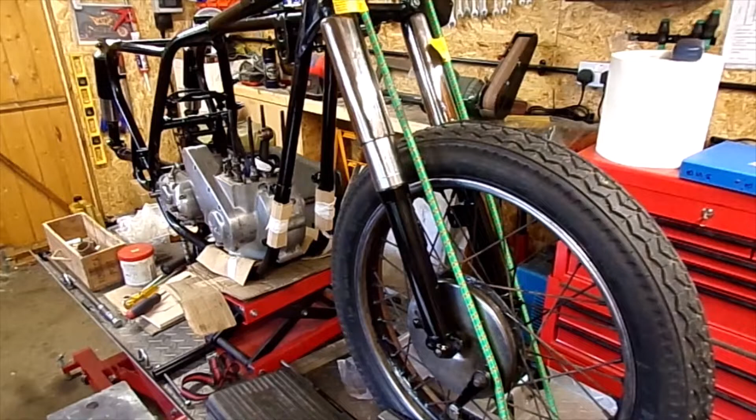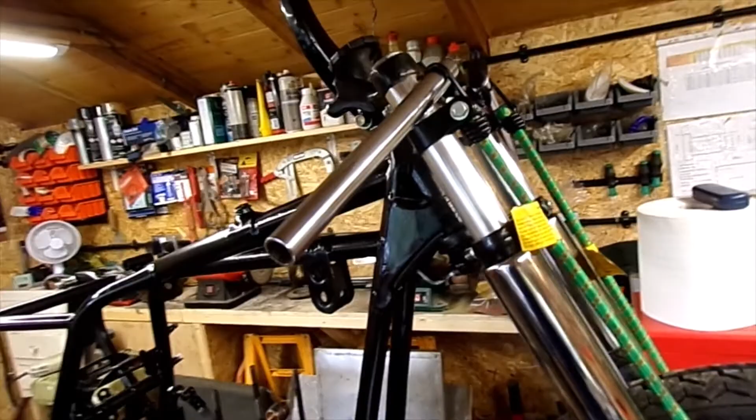Progress on the BSA B31. Front wheel is now in, forks are all in and tightened up, just need to put oil in them. And the engine and gearbox is in - well, the bottom half of the engine anyway.

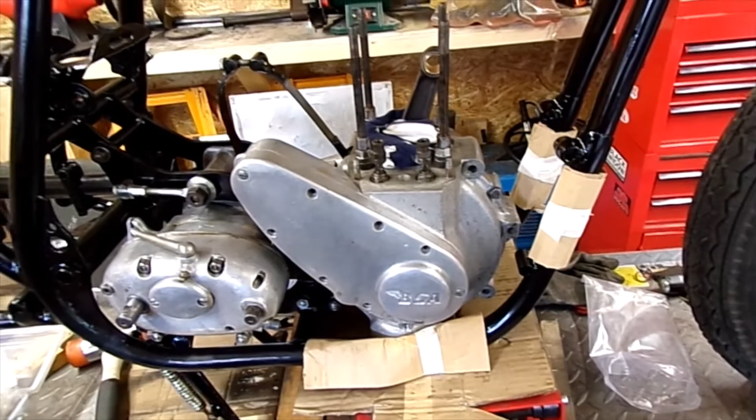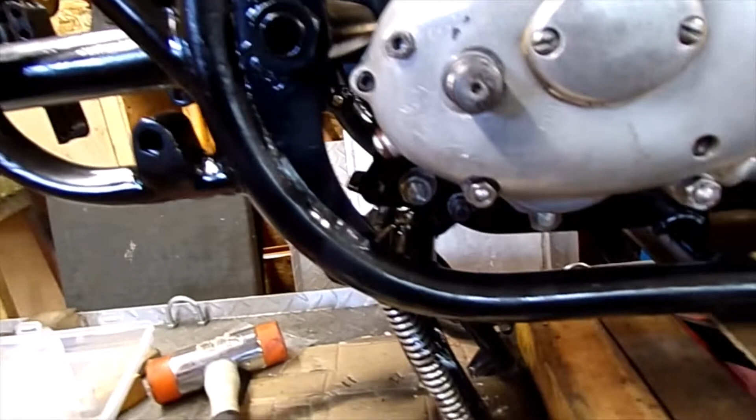Now obviously this is all loose still because I can't adjust that until the chain and everything is on and the back wheel is in. And I've just got to fit the front plates here - that's just these two bolts at the back holding the engine in, and that's just resting on this stand thing here.

And there you can see this bolt here, or the stud - well, they call it a dummy footrest stud, because that's where the footrest stud would normally come out for your forward position footrest. But as I'm going to be fitting rear sets here, obviously won't be needing that.

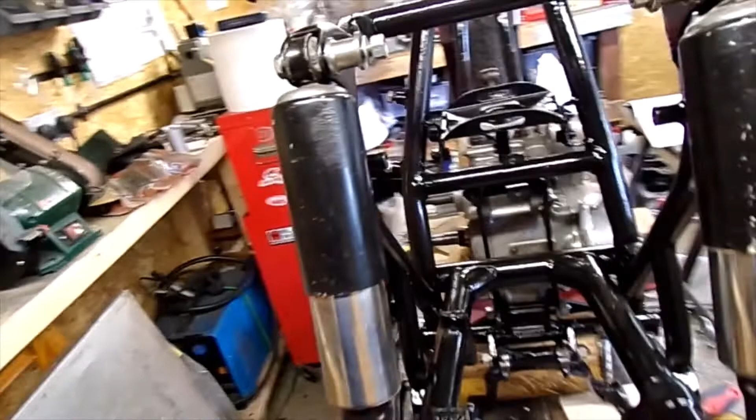Yeah, so the next thing will be putting the chain guard back in. Where is this dust coming from? I haven't got woodworm - well, not me, but the shed.

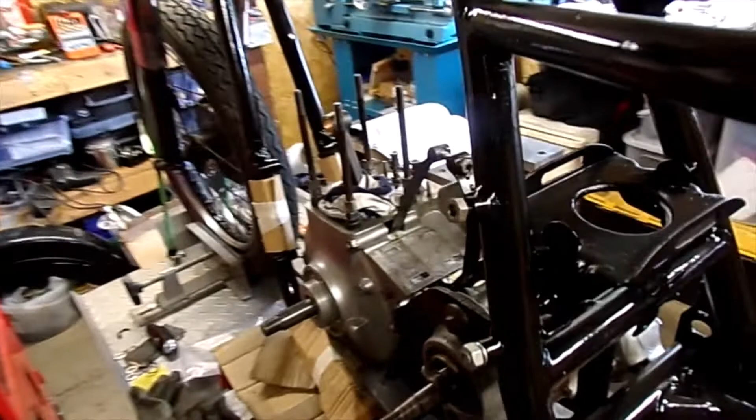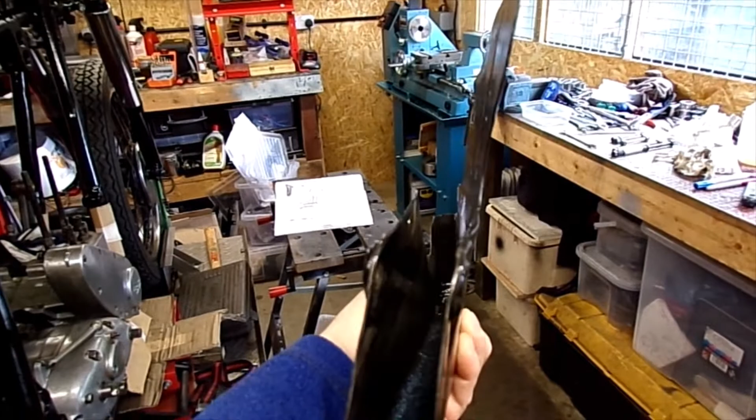Have a look at the state of this thing. Just take it off there. How out of a line is this? Chain guard, look at that. Look, has it warped as anything?

Let's look straight down it. Bent up, that is. But actually, once it's all bolted on, that'll pull straight anyway.

That's seen some abuse over the years. Look at that. Yeah, so that'll be the next thing to go on, I think, and then wheel in.

These plates, there's the engine plates here. Back on.

I'm going to have to get the head rebored though, or the barrel rather, not the head. Yeah, that was a bit too much play really. So once I get that done and back, I can then get the piston fitted, head on, barrel on, head on, mag on, and be getting somewhere then.

So got the chain guard back on, and as you can see, that's straightened up. As I've put the bolts in, it's just pulled everything straight. I mean, it's still a little bit beaten up, but it will do for now.

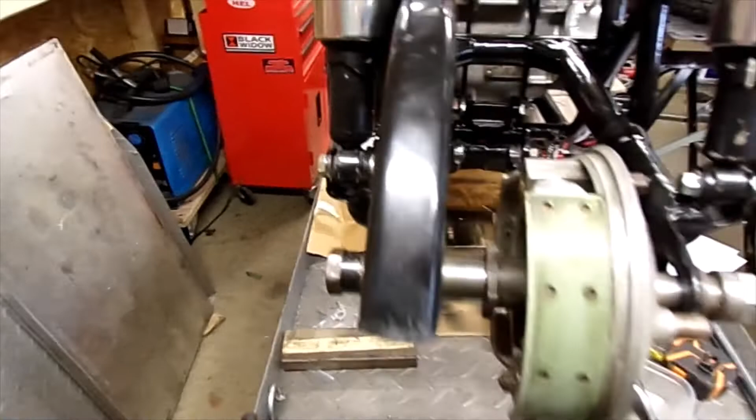I then went to put the wheel in, and I remembered I had a bit of a struggle getting that out. It was quite tight, and I found some anomalies with it.

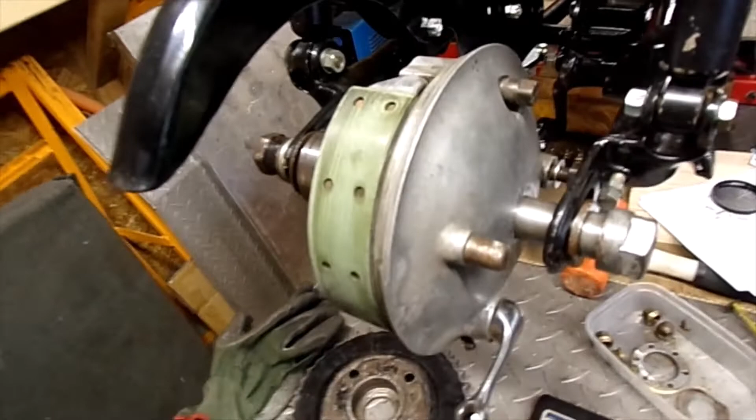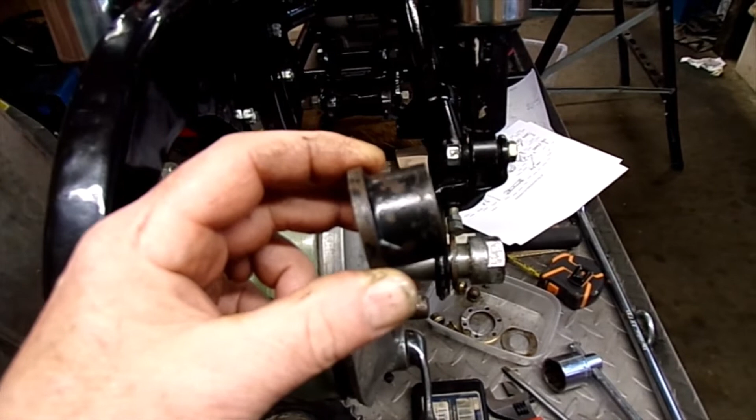So I've basically stripped everything off. I've got it set up on the spindle. The only thing I haven't put on is the spacer, which is not the right one anyway, because that's the bit that was really tight. You can see that to get that in there is a bit of a struggle.

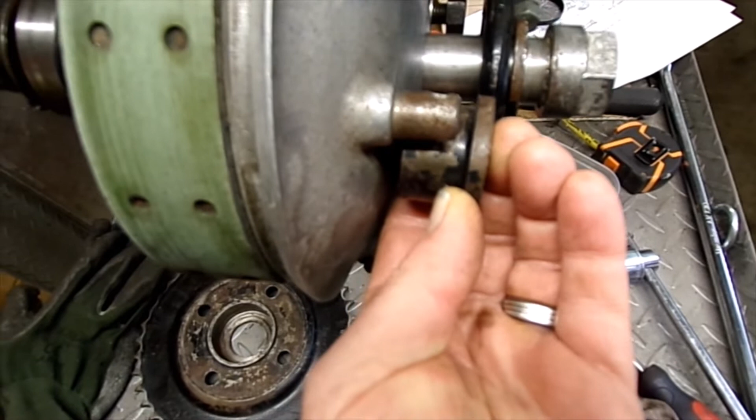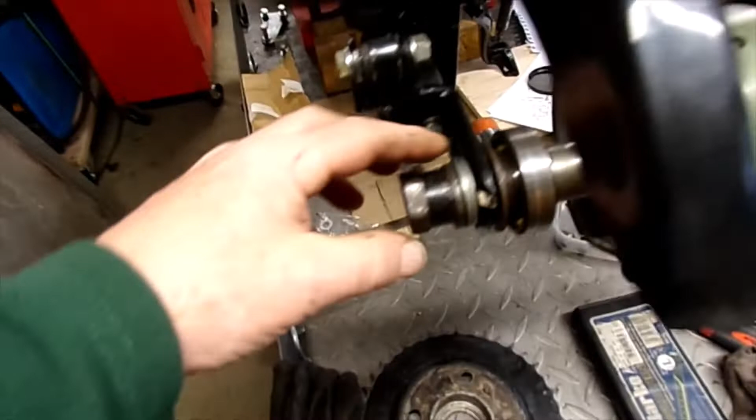And the other thing is, this doesn't really tighten down properly on this side. There's far too many washers on here - there's 3 washers there, and I've only done this hand tight, but even so, it's not even. Oh, it's just about gripping that up now. Yeah, just about grips that with 3 washers, but there should only be 2 there. One should be a special shaped one as well with some flats on it.

As you can see, I just put the bearings back in place so I get the spacing correctly. But yeah, to get that in there, you basically have to bend the swing arm out, which is not good.

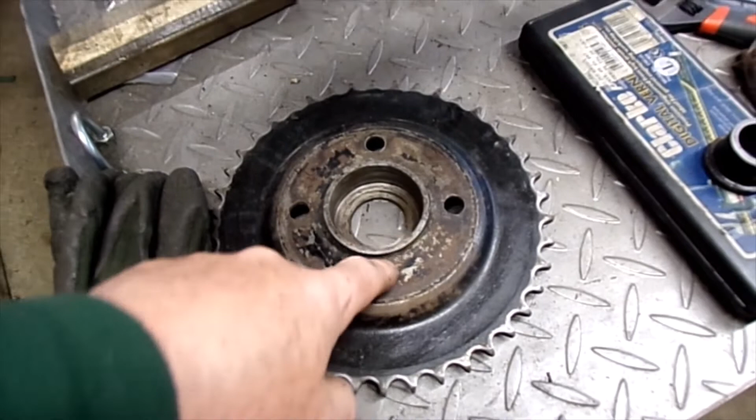But I think what it is, it's got a bit of a mixture of parts here. I've had a look at the parts book and a few pictures online, and I think this piece here is actually for a cast hub, and also this little spacer piece in here. Normally that would sit between there, but it doesn't actually take any space up anyway - it just literally clamps it.

Yeah, so I think I've got the part - I think this part is correct because it's an aluminium hub I've got. I think this spindle here is correct, but for some reason this one is off a cast hub. And I think this is correct, although possibly not the right length - I think that looks like it's been cut down this end. So yeah, somebody's had a real mix up with the parts there to get this to work.

Well, it doesn't really work properly, so I've now got to try and work out what I need to do to get it to fit, or whether I just buy another one of these.

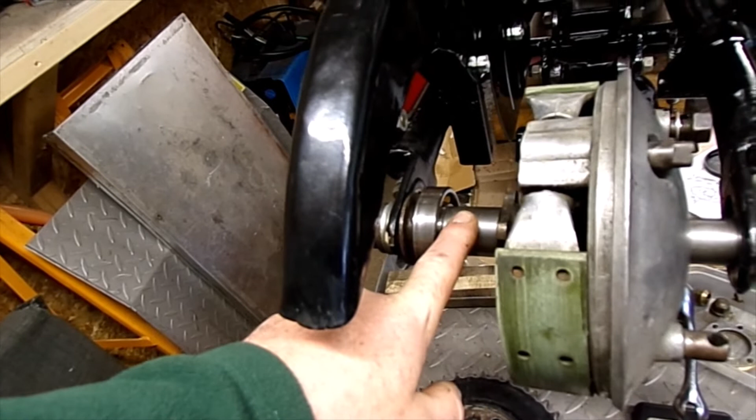I'll take this off in a minute, and I'll also get a photo of what it should look like, so you'll see the difference. I think this is a little bit longer, and that's the problem I'm having - that's why this end isn't pulling up correctly.

I mean, that will tighten it a bit more, but the threads are getting really tight in here. I think it's going too far in, because this part threads into here. Yeah, so it's just not working right, so I need to do something with it.

Yeah, so now I'll take all these bits to pieces and take this whole thing apart, and you'll see what I mean a bit clearer.

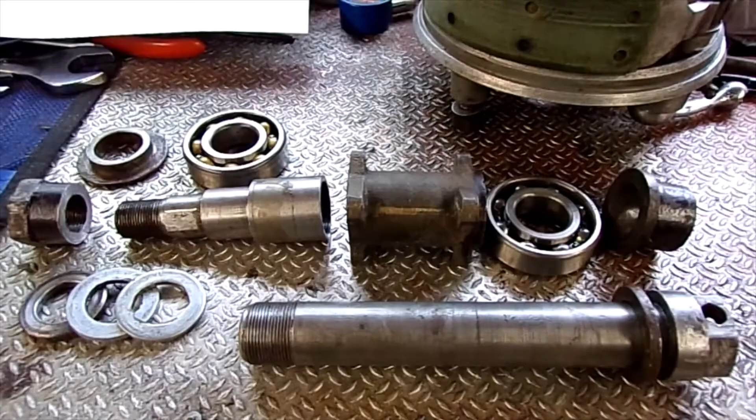Right, so this is the part which I think is - well, that's definitely wrong, that's for a cast iron hub over aluminium. That bit is possibly correct. That bit is wrong, that should look more - I don't know what on earth that is - it should look more like a sort of cotton reel shape, with a boss like this each end. I think that is correct.

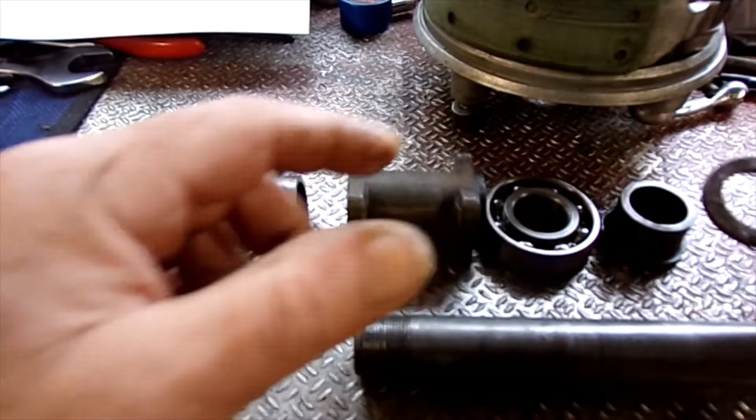That is wrong, that is off a cast iron hub, and these nuts are the same for either, so that doesn't matter. I've got these three washers this end, there's a single one that end, which I think is correct. So that one is probably correct, but there should just be a single washer which has flats on, which goes over here on the correct one.

I think that is too long, that should be much shorter. Like I say, I'll insert a photo and hopefully you'll be able to see the difference between those.

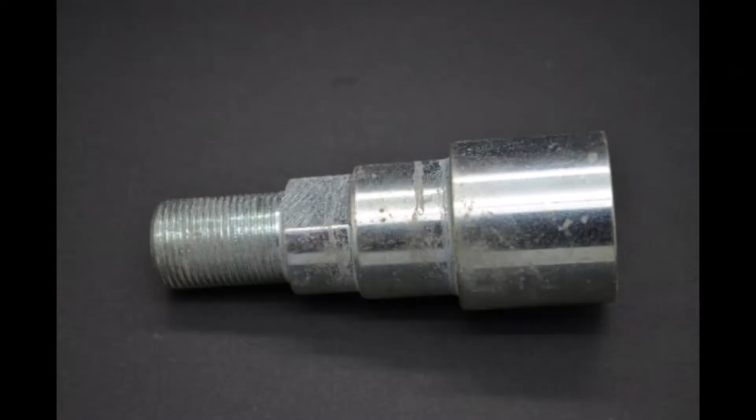So what to do? I've either got to try and machine that down to fit, which, as I don't know the size of the original one, could be tricky. I'd have to calculate everything. I'm going to have to get or make another one of those anyway, because that is just too big at the moment, although when I cut this down it might fit okay.

And the other thing is to make sure I keep the sprocket in alignment. That might not even be in the correct alignment now with this on there. So that is the challenge.

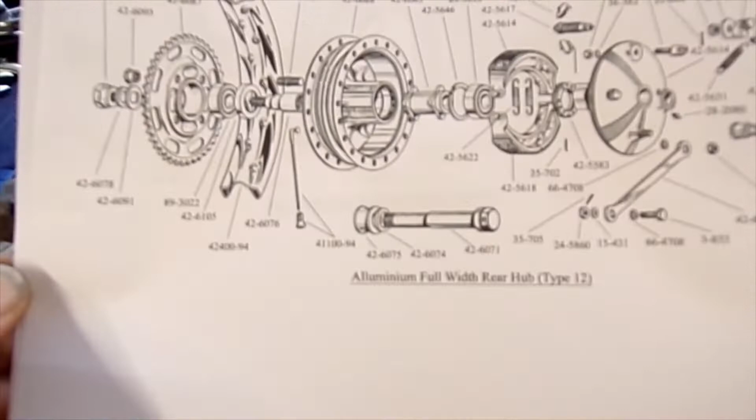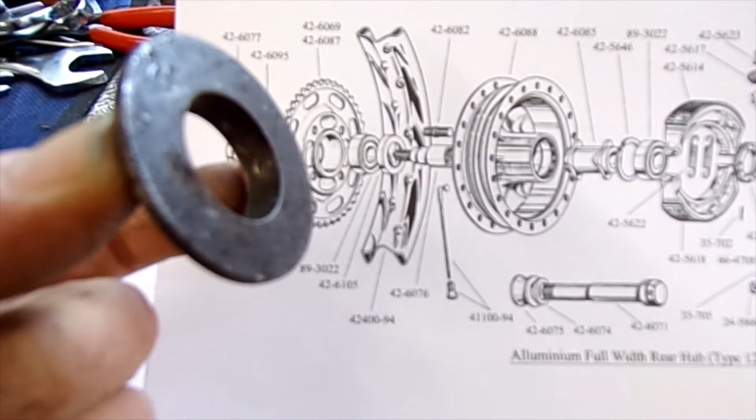Well, I've actually got a couple of pages off the parts book. So that is what should be on there, and you can see that's that funny shaped washer there. This piece here isn't there at all. I think that is just like a dust cover for the bearing.

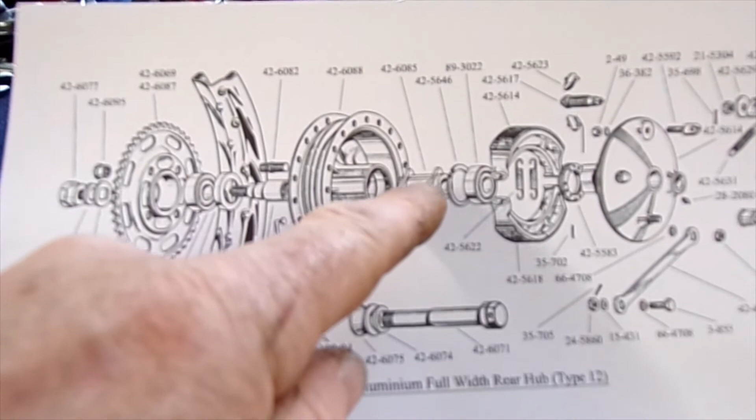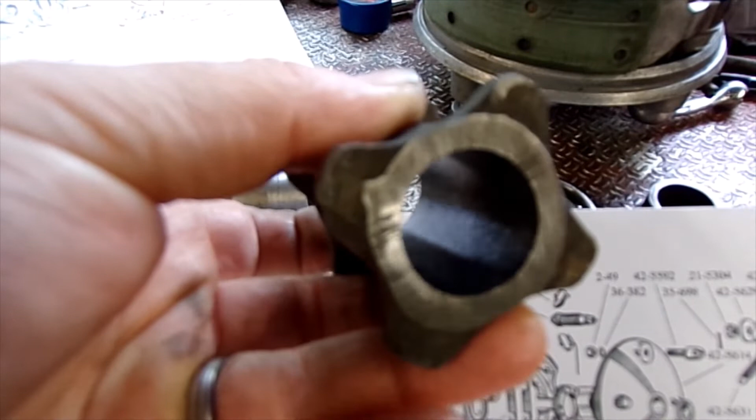That's that spacer there. Though there does appear to be a couple of different sizes. You see that's got a boss that end and no boss that. I think that's been removed to fit, or try and make it fit as best as possible. And that's the little cotton reel shaped spacer, the other end. There's a bearing lock ring, which doesn't really come into the equation on this, that doesn't affect the spindle width.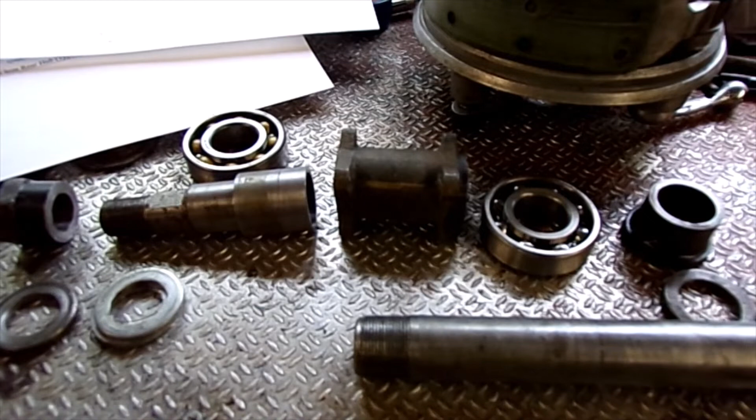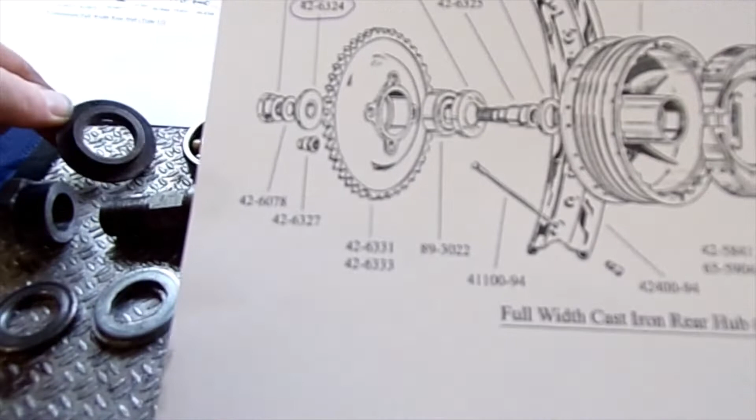And this is the cast iron hub. So there is that piece, although actually on the bike it was fitted that way round, so not too sure which is the correct way round, but that's for a cast iron hub anyway. So obviously that is that, and there's also another little dust cap for the bearing there.

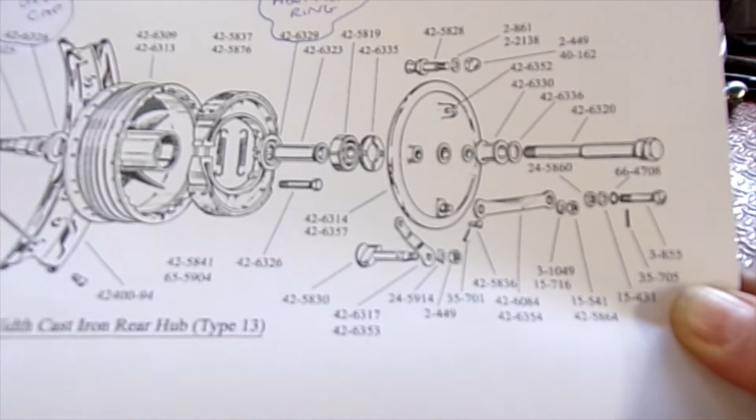The spacer is just a plain steel with a boss on one end, not like this at all. Yeah, and there's basically one washer each end, and there's a cotton reel type spacer, which is a different part number to what's on the aluminium hub anyway. So got a bit of a mixture going on.

So that is the challenge, to try and sort that out. I think I might have a go at machining this down first. If that doesn't work, you can buy these - I think Draganfly do them, stainless steel ones, for about 20 quid, so that's not too much of an expense.

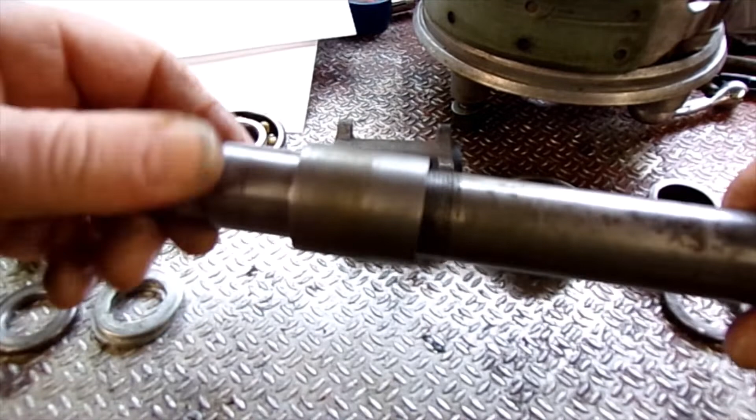And the threads are a little bit tight on there, so whether that's got damaged because that's been over tightened or what, but yeah, might have to try and clean those threads out somehow.

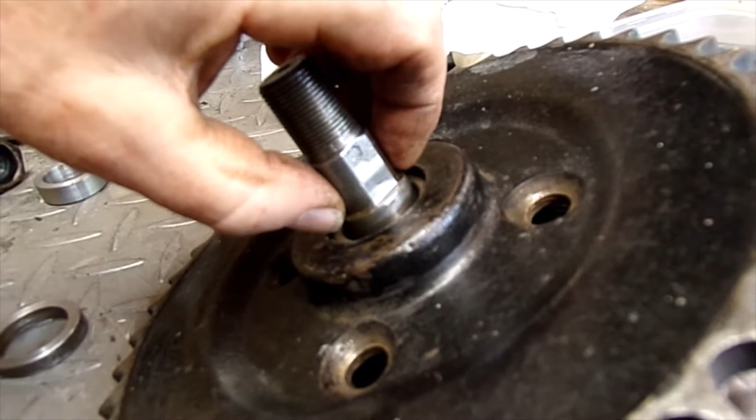Right, I've just took that flat down a bit further. That stopped right there somewhere, so this wasn't pulling right up to the shoulder. So I've just increased the length of those, depth of those flats, so that'll pull in a bit more.

This is the little spacer bit, which I cut from that other spacer. That goes like that. Change hands now.

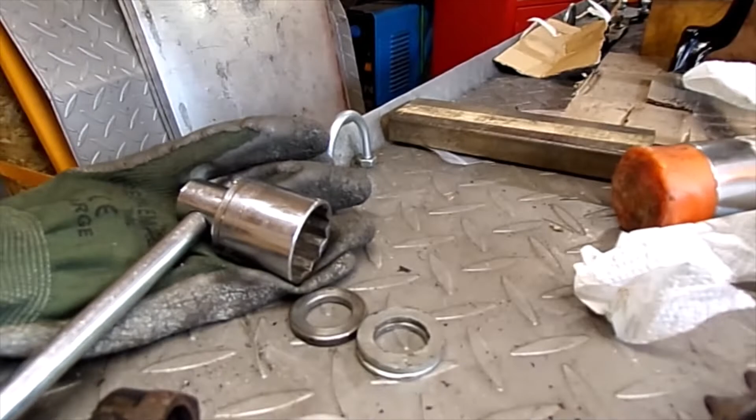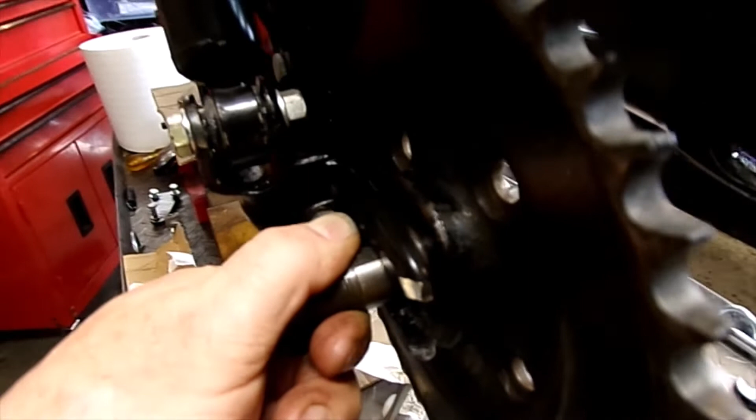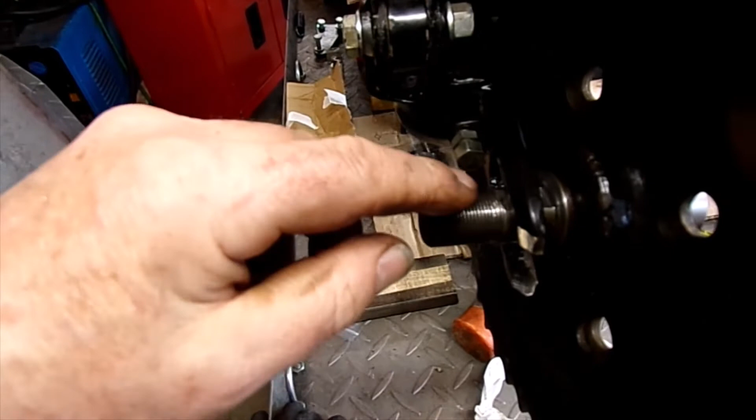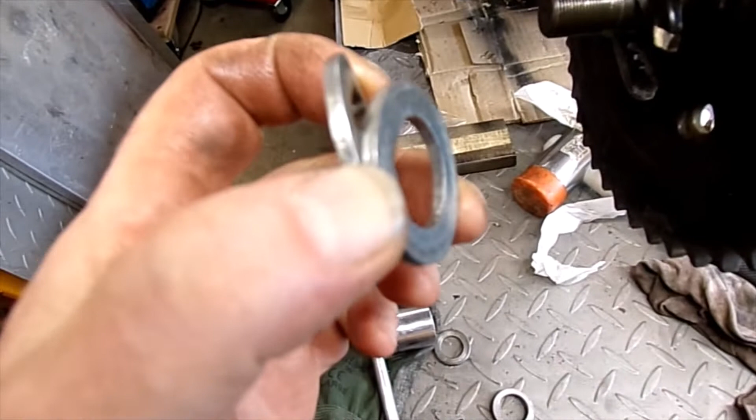Right, so that will now slide in there, and this will pull right up tight, which I wasn't doing before, but has made another problem, that I need to now make a sleeve to go over here, so I don't have to use all these washers here. So that'll be the next little bit to do.

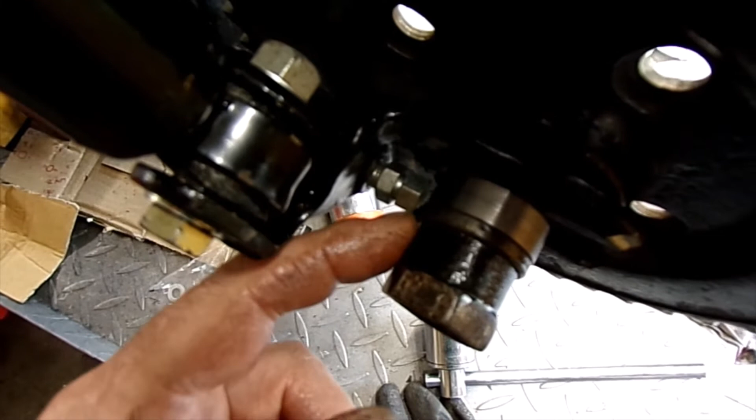Right, that's a little spacer made for there. Probably could have made that a little bit wider, because this doesn't quite touch. It tends to touch on this washer. Well, that washer in there square. But at least it's holding this tight now, which it wasn't doing before.

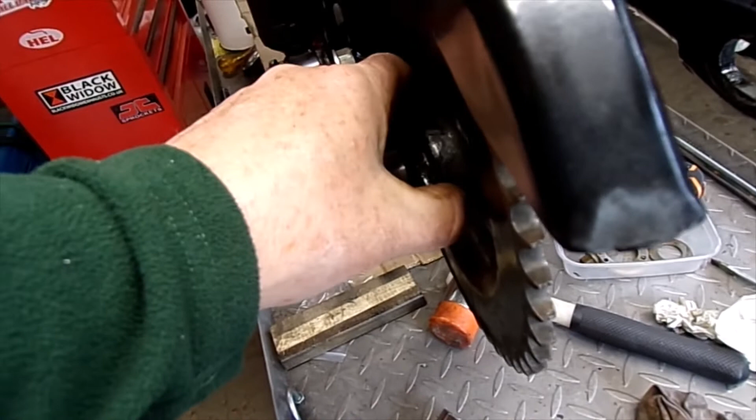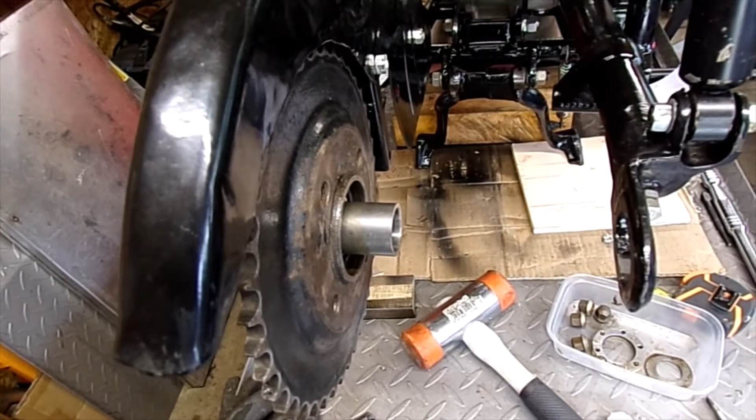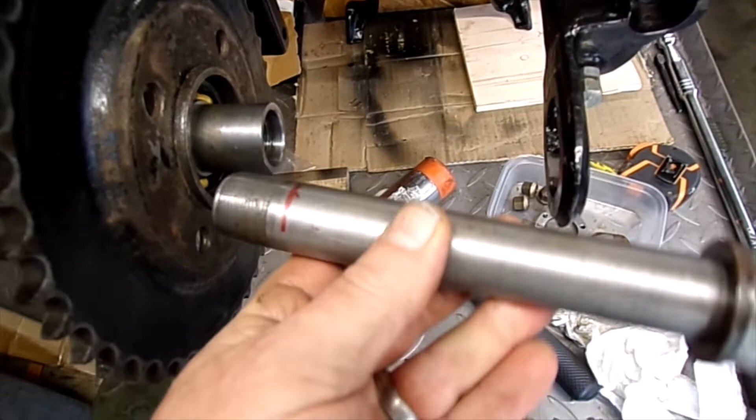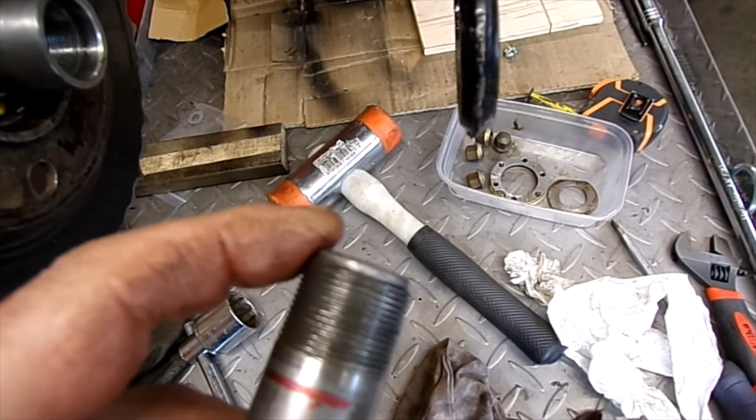Yeah, so next piece is this spindle here. And I think what I'm going to have to do is take a little bit off the end of here, because that line I've got there, that red line, that's as deep as it will go. That's screwed in, and still got a bit of a gap that end. So I think I'll probably just have to get this in the lathe and put a little bit of relief on this end of this, so that will screw further in. Then I think that will be done.

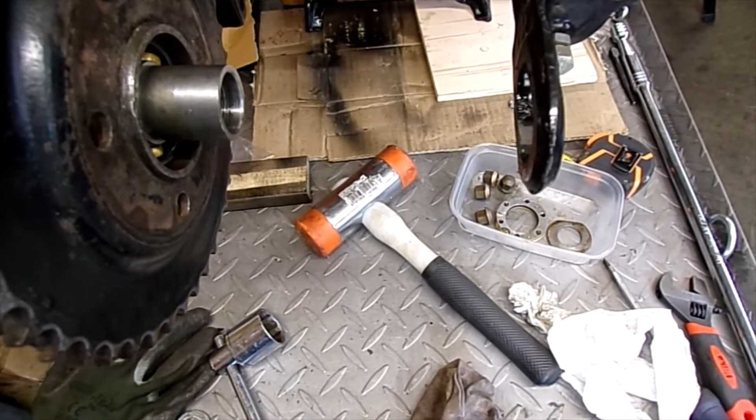Apart from the new bearings, I've got some new bearings I'll order, so once I've got those I can put it all back together.

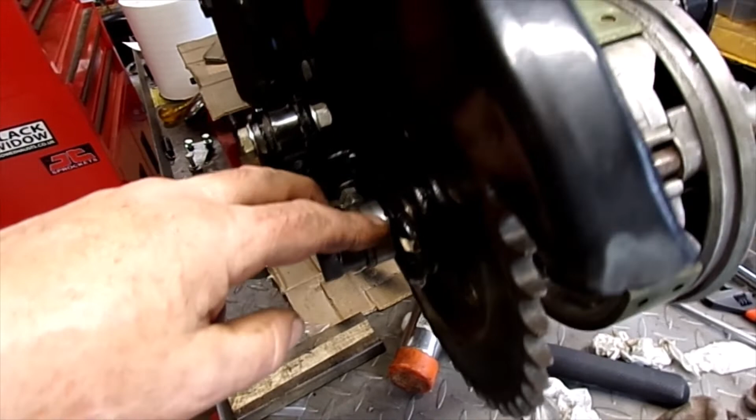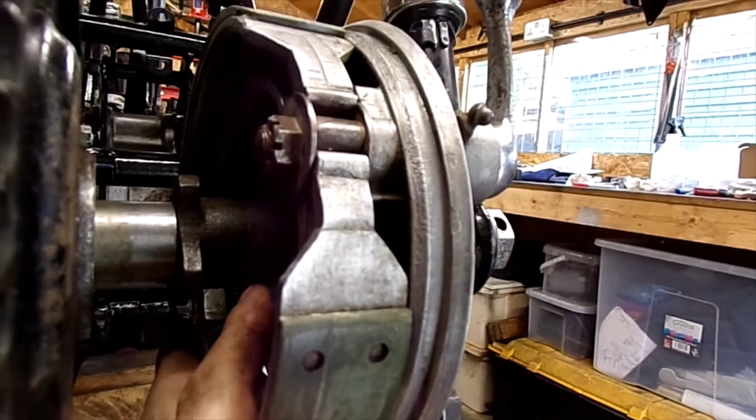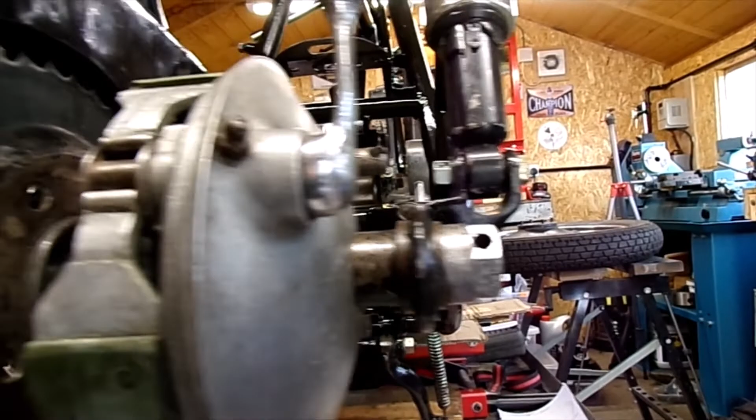Right, that's on there now. Got the new bush there. There's a cut down one in there. There's the spacer, there's a bearing in there which you can't quite see, and that's the old spacer there, which I just had to knock about 2mm off it to get that all to fit. And this is all nice and tight now, which it wasn't before.

Yeah, so once I get the new bearings I can get all that back together on the wheel, and job done.